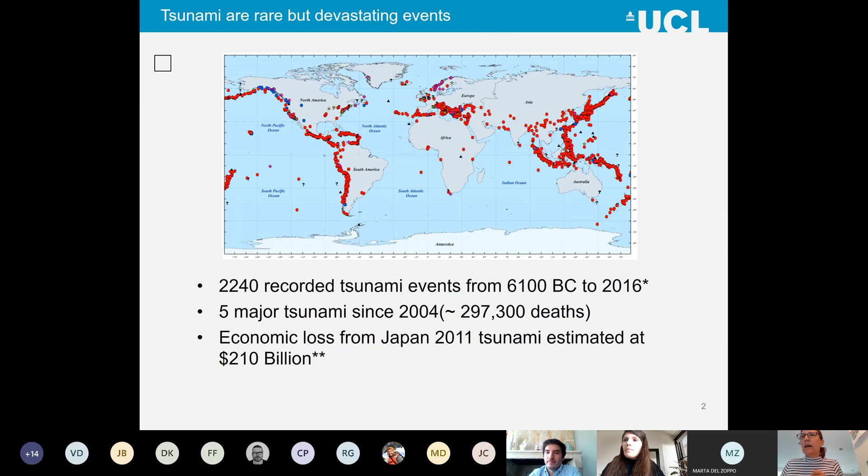The work that is presented today is part of research that I've been conducting for the last 13 years with a number of partners. So I thought I would list these here to start with, to show that this is not just one or two people's work, but actually the work that Marta and Marco are presenting. All of that has been led up to by significant collaboration with many partners across UCL, as well as outside of UCL, HR Wallingford, etc.

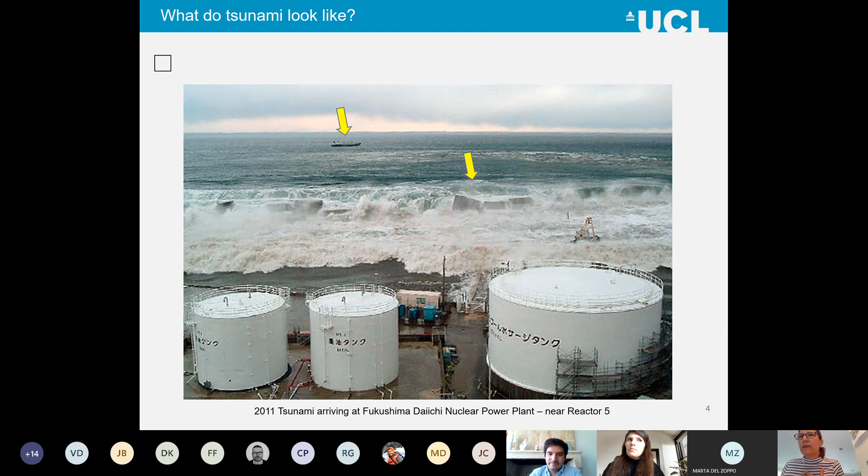A particular feature of tsunami compared to other waves is their wavelength. They are extremely long, and this is important from the point of view of the inundation properties as well as their forces on structures. So we're focusing on the structural engineering part of tsunami today.

But the characteristics of the tsunami have an important influence on the loading that the structure feels. This is a picture of the Boxing Day tsunami as measured by an echo sounder offshore of Thailand, showing a wave period of about 23 minutes. This long wavelength results in a very long duration inundation onshore.

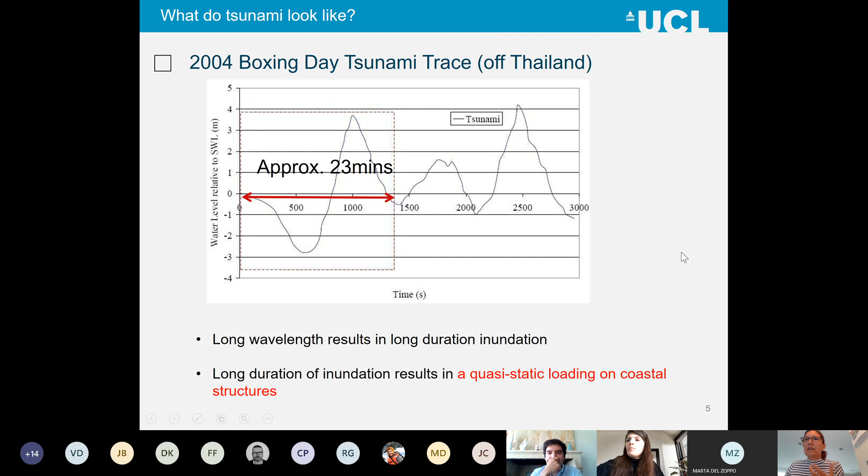So we're talking flows that last minutes, not seconds. This long duration inundation results in what we now know is a quasi-static loading on coastal structures. It's worth remembering this because many of you are earthquake engineers and not used to thinking about static loads so much as dynamic loads. A revelation to myself was that in the case of tsunami, buildings' dynamic properties are actually not excited.

In this image, I'm showing a set of curves for a single degree of freedom system, or a series of such systems with different ductility levels shown in different colors. It looks at what overstrength these elastoplastic systems can achieve when affected by loading that lasts a duration T compared to their period.

Looking at the curves can be difficult to interpret, so let me give a practical example. If we think of a 10-story building with a natural period of around 1 second and a ductility of 4, looking at the curve, its overstrength will be about 0 for any load that exceeds a duration of 3.5 seconds.

It's not exactly just the load duration, but a load greater than its yield strength. So as a tsunami load can exceed 20 minutes, the ductility plays very little role.

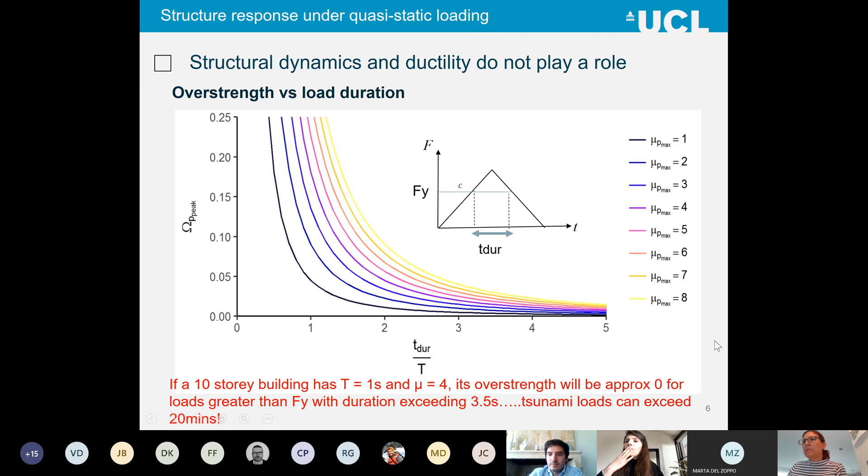And I think it's a difference that has been largely overlooked because tsunami engineering has been led by earthquake engineers. So what are the other differences between earthquake loading and tsunami loading? Quite simply, the distribution of loads.

If we think about a nonlinear static approach often used in earthquake engineering, you apply the loads in an inverted triangle, as shown here. In the case of tsunami, the loads come from below. The water inundates the ground story, first story, second story in sequence, so the loading is applied from below in a triangular approach.

Now, if we push over the structures using these two different loading distributions, we see very different loading capacity, or strength capacity, of the structures. Under earthquake loading, the seismic strength is actually much smaller than the tsunami strength. This is interesting, as there is no direct relationship between the earthquake capacity of a structure and its tsunami capacity.

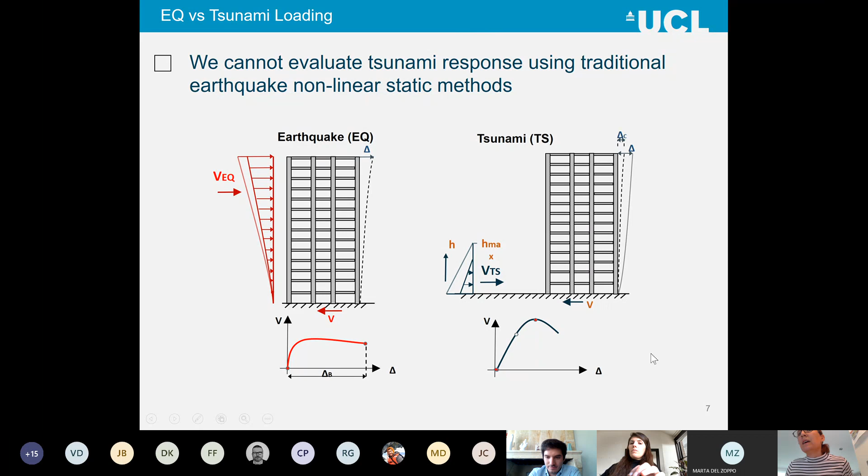This is something Marco will come to again in his presentation. So the two main differences between earthquake-responsive and tsunami-responsive structures are given by the nature of the loading: the fact that it comes from below, and the fact that it's long duration, so ductility essentially plays no role. A tsunami response is dominated purely by the strength of the building, with no contribution from ductility.

Tsunami loading, because it comes from below, applies massive shear forces, lateral shear forces on the elements, particularly at the ground story. Again, this is something you'll see in both Marco and Marta's presentations.

But because it's long duration loading, nonlinear static methods can actually represent the tsunami response of a structure well, much better than in an earthquake situation, because earthquake is a strongly dynamic loading. In tsunami, we assume it's static when applying pushover methods, and actually it is. So nonlinear static methods can represent tsunami response properly, but we cannot use the same methods we use in earthquake engineering.

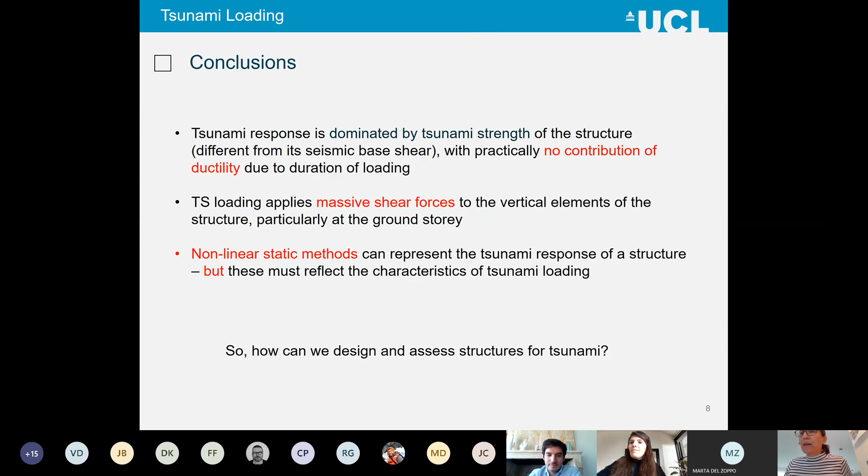So new tools need to be developed, and some of these will be explained by Marco. In the next two presentations, you'll see a summary of some of the advances in both design and assessment of structures for tsunami carried out by our research group and collaborators. I hope you will enjoy. I'll pass over to Marco first, and thank you all for listening to my short introduction.

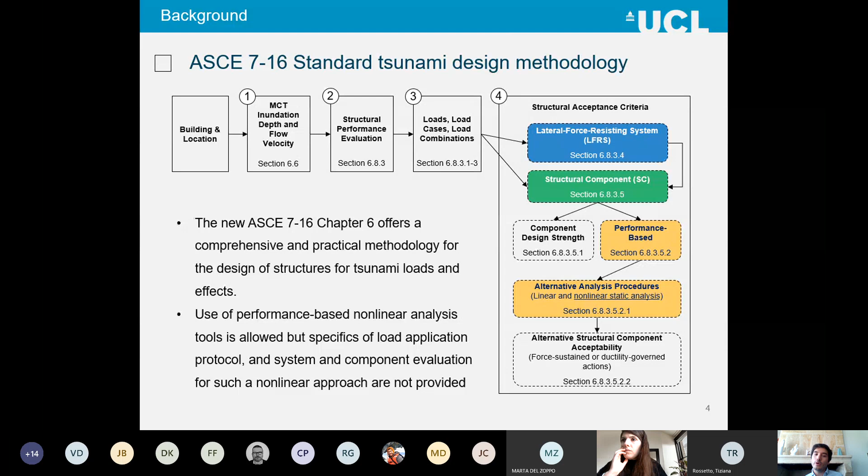So the question for most of you might be: how do we perform a tsunami pushover analysis? As Tiziana mentioned earlier, we can start from the seismic pushover analysis, which has been a typical approach in past research studies. Essentially, it's called constant depth pushover. You apply fixed loads at fixed locations along the height of the structure, and you push that structure up to failure, assuming a constant depth.

But as you may expect, this is not very realistic, because in a tsunami there is an increase and decrease of the tsunami depth and flow velocity over the duration of the event. That led to the development, a few years ago at UCL, of the variable depth pushover, which was found to better capture the effects of the tsunami on the structure.

In these analyses, both the tsunami depth and the flow velocity are increased following a load control approach. That is, however, a limitation, because it cannot capture the degrading branch of the pushover curve.

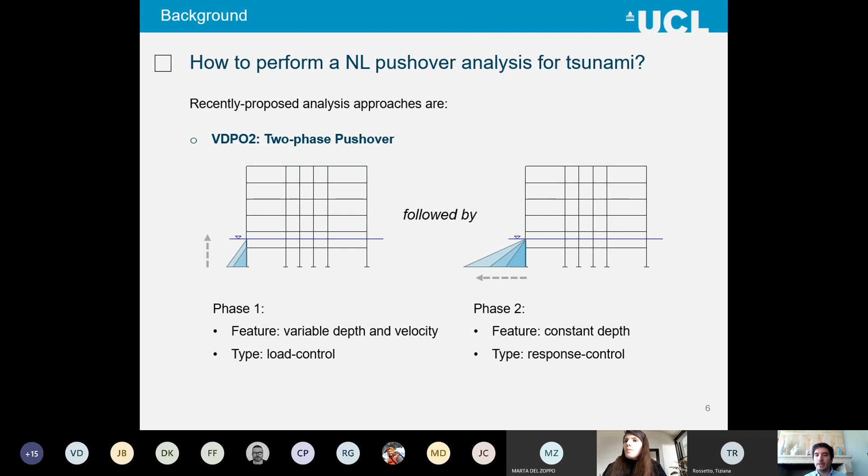So more recently, we came up with an approach called VDPO2. It's essentially a two-phase pushover that combines the advantages of both methods. In the first phase, we apply an increasing load in depth and flow velocity up to the point where we want to stop the analysis, because we have reached a prescribed load, or because there is a numerical convergence issue. At that point, the analysis switches to a second phase.

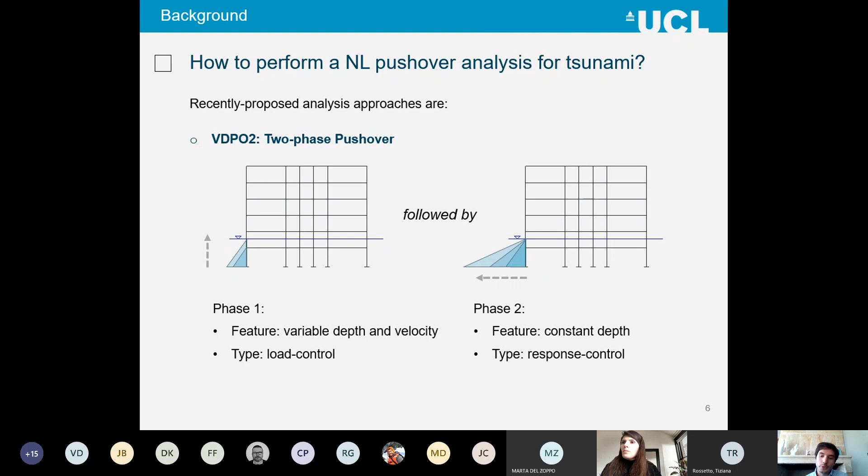Now, the presentation today will show you how we try to adapt this methodology within the design framework of the ASCE 7-16, to provide a tool that users and practitioners may follow when they have to design a structure for tsunami loading.

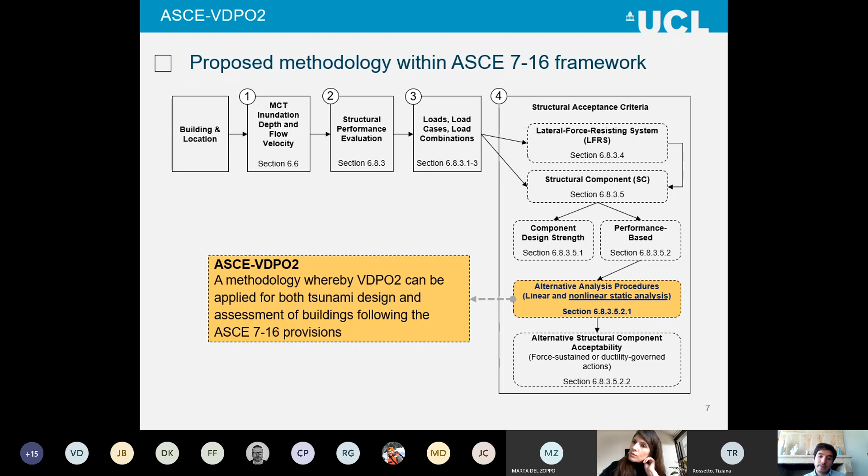To demonstrate this approach, I will be using a case study building: a six-story reinforced concrete building located in a very highly exposed area to tsunami in Seaside, Oregon. This area is also adjacent to the Cascadia subduction zone, so seismic and tsunami hazards are both very high.

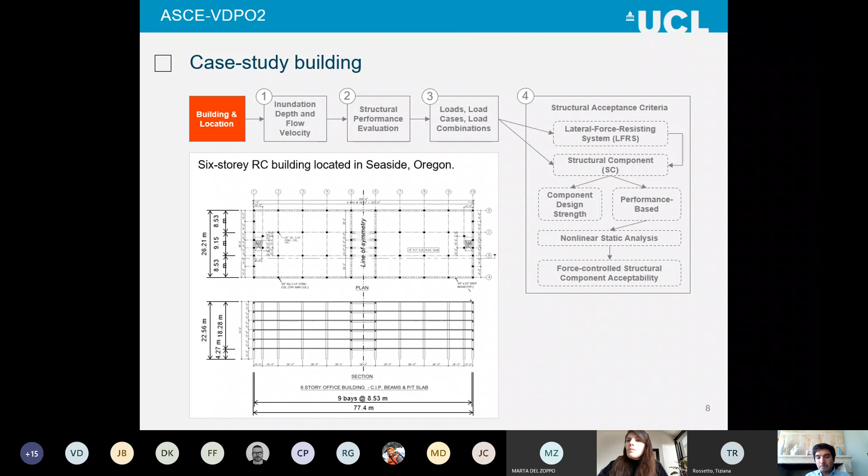What is important to mention here is that using this geodatabase tool, you can identify all the locations that are vulnerable to being inundated along the US coast by a 2,500-year event. That's the maximum considered tsunami according to the code.

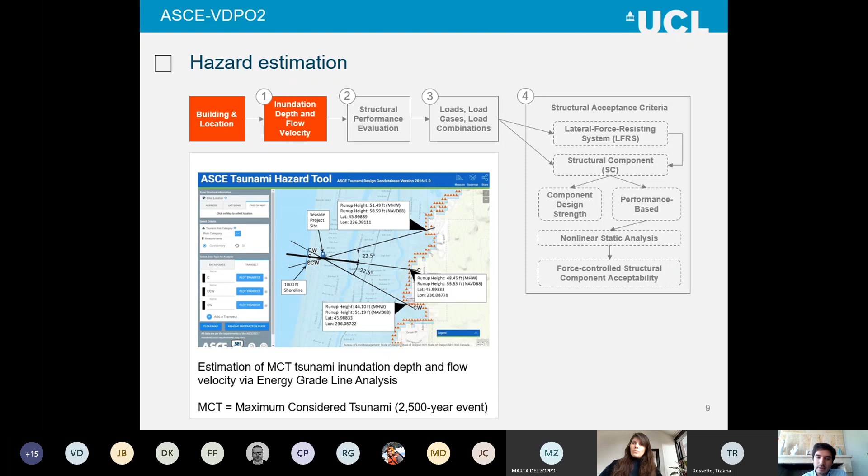So the code also provides a time history curve for the tsunami, meaning how the flow depth and flow velocity are assumed to vary during the event. That identifies some load cases that are part of the design process.

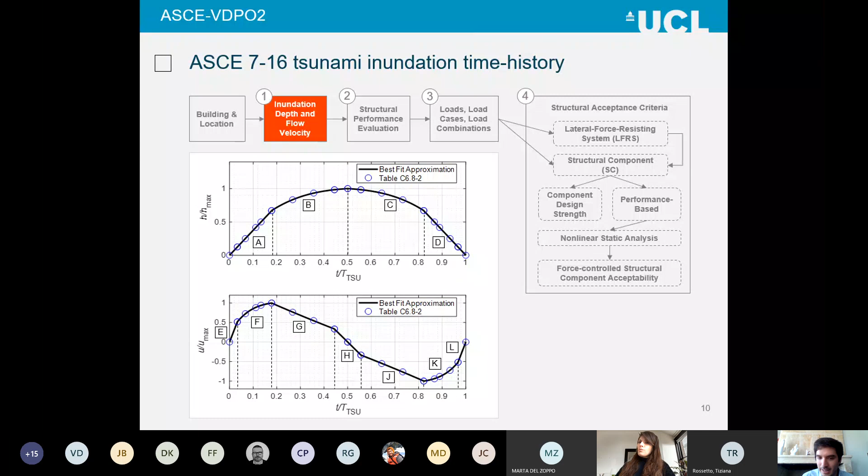What's important to remember is that these are the two main parameters that characterize the hazard at the building site, and one can relatively easily estimate the total force applied to the structure that will be resisted by the lateral force resisting system.

It's interesting to note that the maximum force occurs when the flow velocity reaches its peak and the flow depth is 2/3 of the maximum value. This stage is identified in the code as load case 2. So this is the background in terms of design.

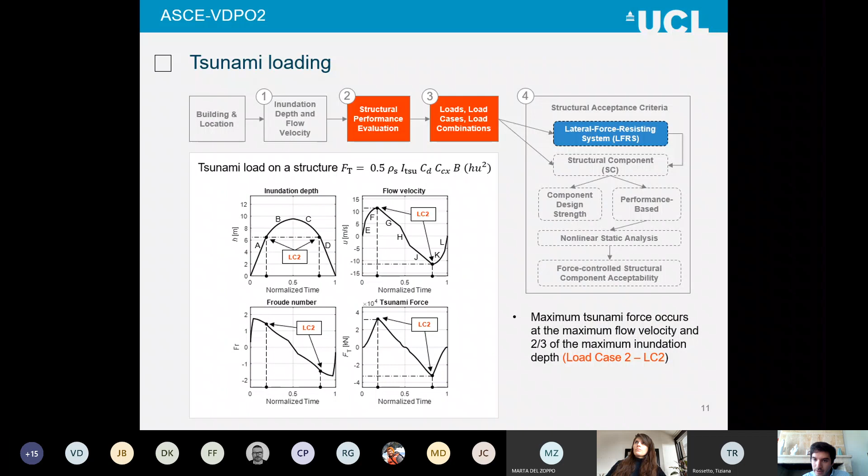So how do we apply all this into our pushover analysis? It's clear that load case 2 is controlling the design of the structural system. So what we have come up with is to apply directly the pseudo time history analysis curves provided by the code into the analysis tool, so that we can evaluate the behavior of the structure up to this maximum force. At that point, the analysis can switch to a constant depth pushover to bring the structure to failure.

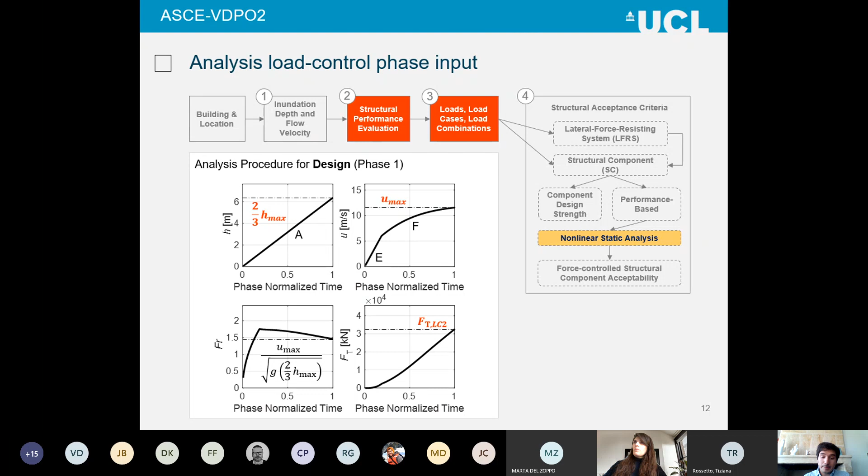But once we know this force, the question is, how do we apply this force to the structure? The ASCE 7-16 considers the tsunami force as uniformly distributed along the structure, but does not prescribe how this force should be applied along the columns when discretized.

A typical approach in past studies has been to do something similar to a seismic pushover, applying nodal loads at the story level—these could be named story loading discretization. An alternative approach tested more recently is, instead of applying loads just at the story level, to apply loads along the columns.

So a distribution of point loads along the columns was found to provide a better estimation of the impact of the tsunami loads on the structure.

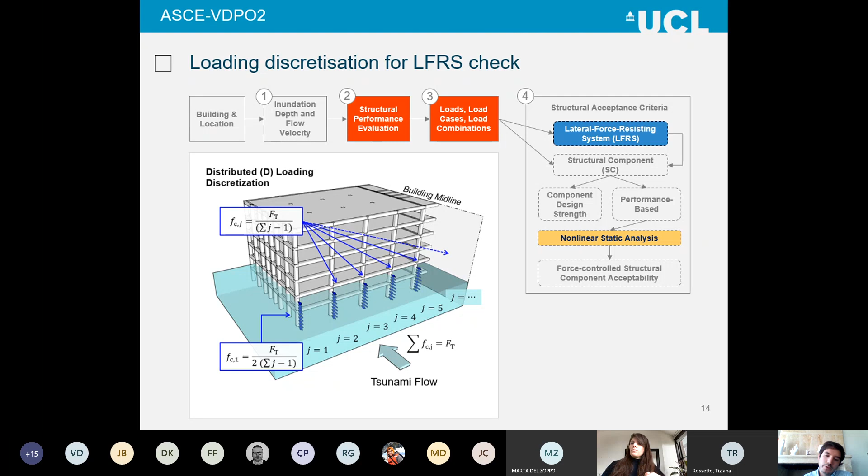An important aspect to understand here is that a portion of the loads by which we discretize the overall tsunami force goes directly to the foundation. So what we're actually looking at is the net tsunami force that is going to be resisted by the lateral force resisting system.

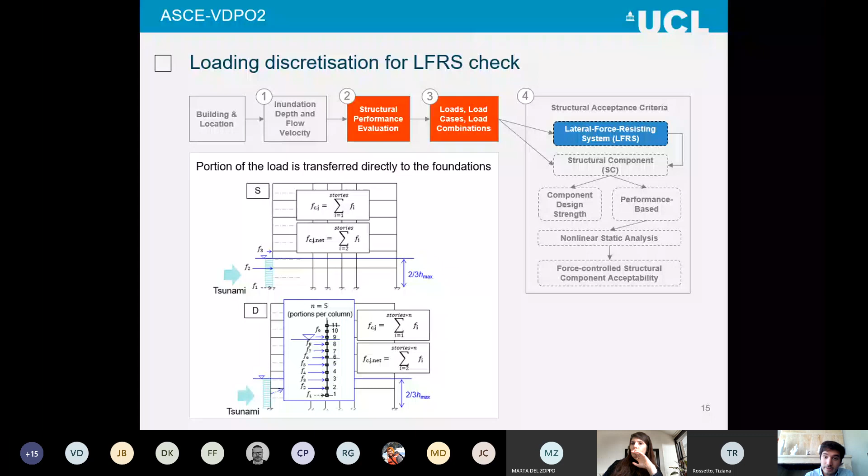At the start of my presentation, I mentioned there are two main checks to be done according to the codes. One is the systemic check on the structural system, but the second one is on the structural components. So individual structural components are subjected to an enhanced tsunami force due to local effects around the elements.

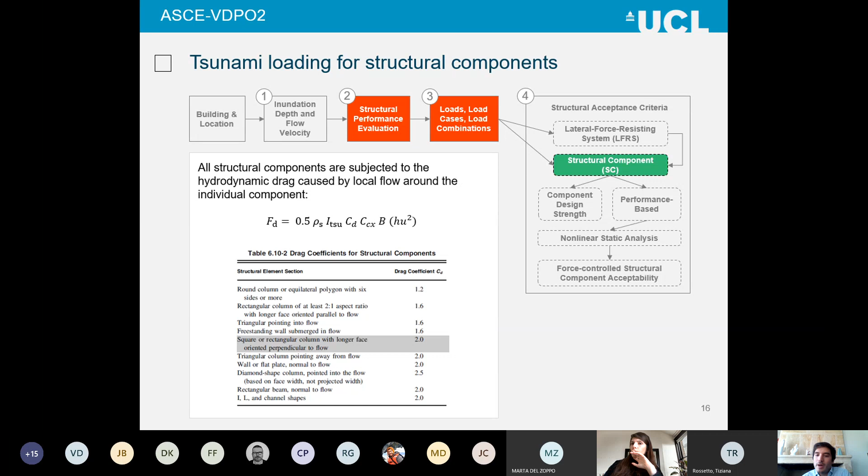Also, if these structural elements are part of the lateral force resisting system, they should be tested against the combined effect of the systemic and structural component loads. That means we need to come up with a discretization that accounts for this second check.

So this is what we have proposed: to apply a distribution of point loads to the individual line of columns where we want to perform the structural component test check, and apply to the remaining columns the remainder of the systemic tsunami force.

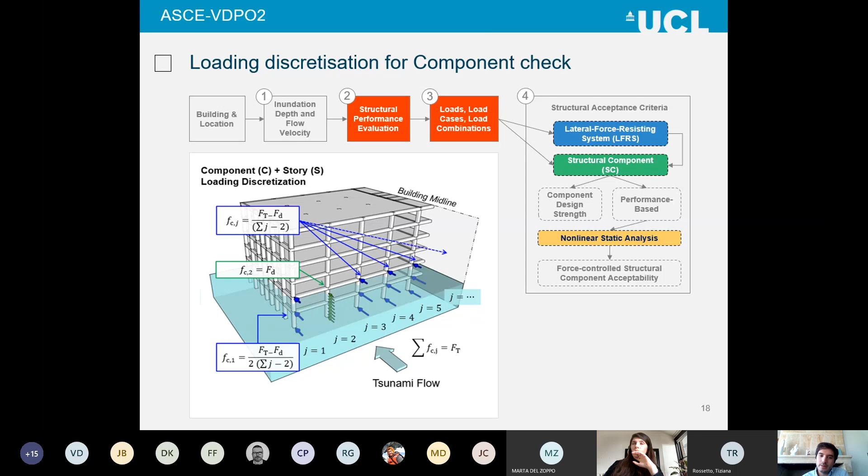These remaining columns can be subjected to either point loads or distributed loads, as in this sketch. We have tested all these assumptions and loading discretizations in a finite element model in OpenSees.

So I developed a 2D model of the structure. Due to time restraints, I'm not going to go into the details of this modeling, but I want to highlight two things. First of all...

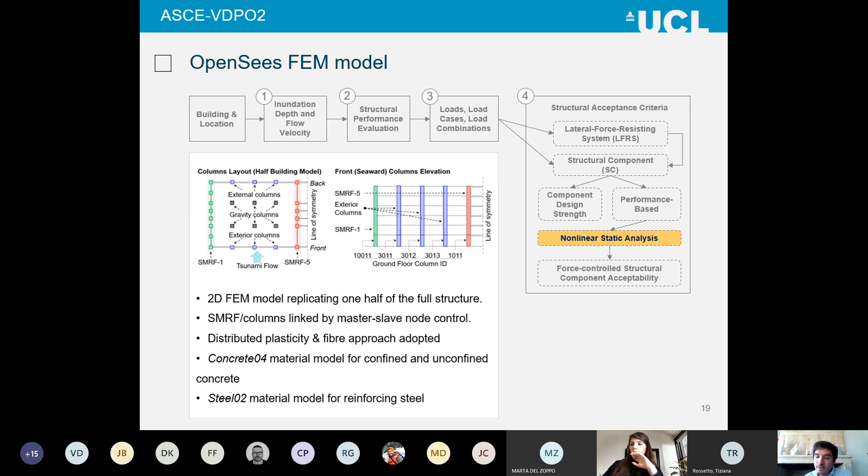A distributed plasticity approach for modeling the structural elements is essential because we are applying a distribution of point loads along the elements—something you may not always assume in a seismic pushover analysis. But also there are shear reinforcement variations along the ground floor and upper story columns, which can also play a role in the response of the structure to this tsunami loading.

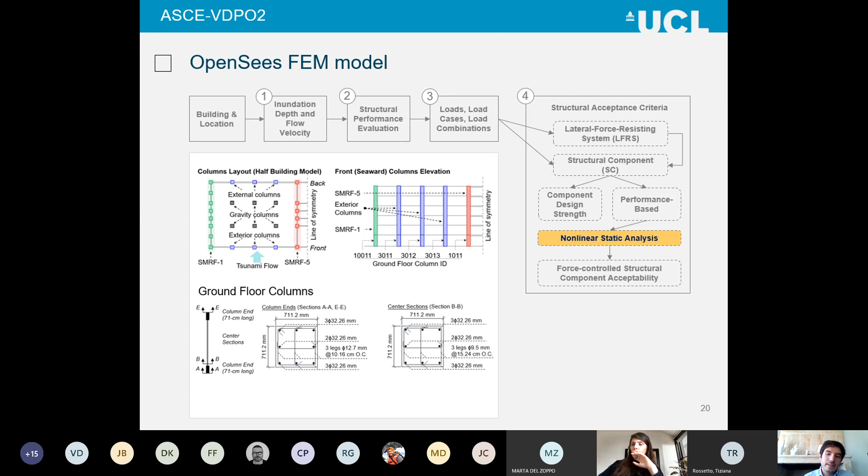So let's now have a look at the results and compare what you get using the prescriptive systemic check—what ASCE 7 tells you to do—by using a simplified approach that essentially compares the applied tsunami force as calculated before with the design strength of the structure, the seismic design strength of the structure, enhanced to account for the typical overstrength.

For this specific case of the building, the applied tsunami force is smaller than the expected seismic strength. But what is interesting to note is that this expected seismic strength, as defined by the code, is essentially based on the overstrength factor for the typology of frame—here a reinforced concrete frame—and the design base shear, depending on its location and the gravity weight.

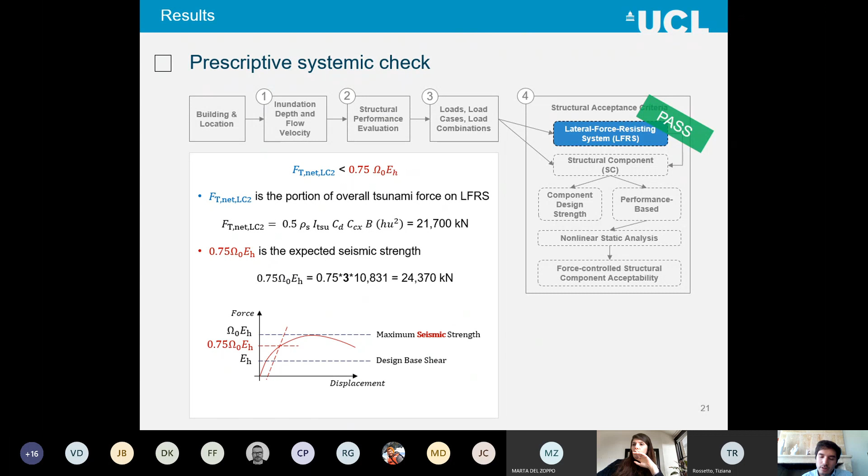So what happens when we apply instead a tsunami pushover analysis? Well, the overall outcome is the same, because the black line on the graph shows the tsunami pushover, which is much larger. The lateral strength is way larger than the tsunami load case force, exceeding the design event force by 40%. So the lateral force resisting system should be sufficient to resist the tsunami force according to both checks.

But to draw a fair comparison, we also performed a seismic pushover analysis on the building, and we found that the actual strength of the structure is smaller than what was expected by the code. Generally speaking, this identifies an issue with this simplified check, because in this specific case, using the actual strength, the simplified check would fail the test.

But more interestingly, as Tiziana mentioned at the start of her introduction, the behavior and response of the structure under tsunami loading is significantly different from the seismic one, because we can see an increased stiffness and increased lateral strength. This is what we have observed in past studies as well, because it reflects the different nature of how seismic and tsunami loads impact the building.

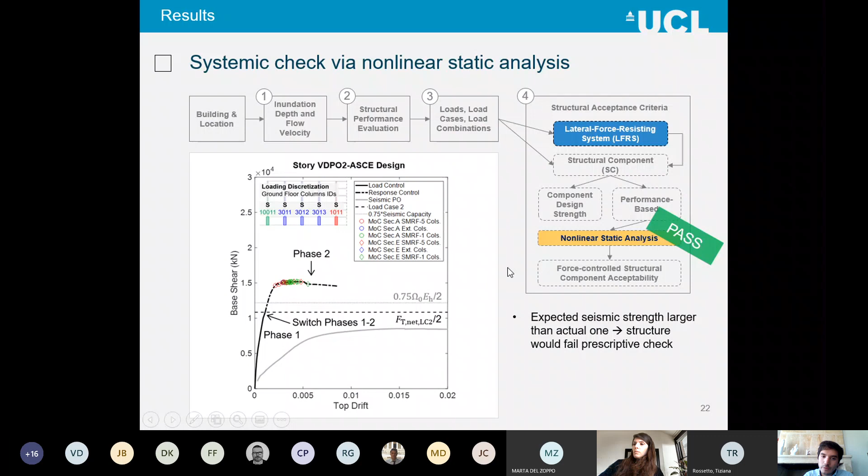When we use the other assumption for the discretization of the overall tsunami force, we can see a different strength, because the share of forces that goes into the foundation is much smaller under this assumption.

But since the forces are applied mainly at the ground story columns, this induces large shear forces, and therefore the occurrence of shear failure, shown here as filled markers along the curve. That occurs earlier than the flexural yielding in the columns.

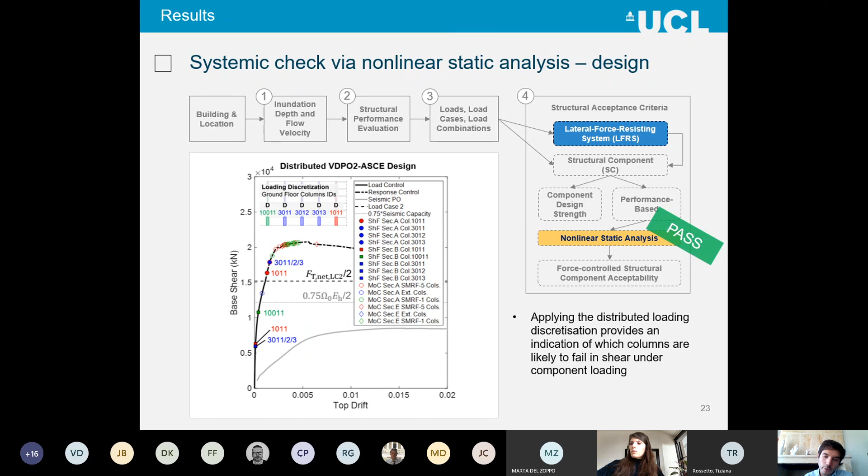Now, this distributed loading discretization can help us understand what happens when we apply considerably large forces at the columns, but it does not reflect the component loading, because the component loading, as I showed earlier, is an enhanced force on a single individual column.

So that is what we have done in the next check: for the structural component, we apply this enhanced loading on a single column and see what happens. Essentially, the output of this check is that the structure, or specifically the ground floor columns, need to be strengthened to meet the collapse prevention performance level.

You can see the advantage that by using the tsunami pushover analysis, you could identify, in a relatively effective way, which elements need to be strengthened. We found similar results using either distributed or story loads for the remaining elements.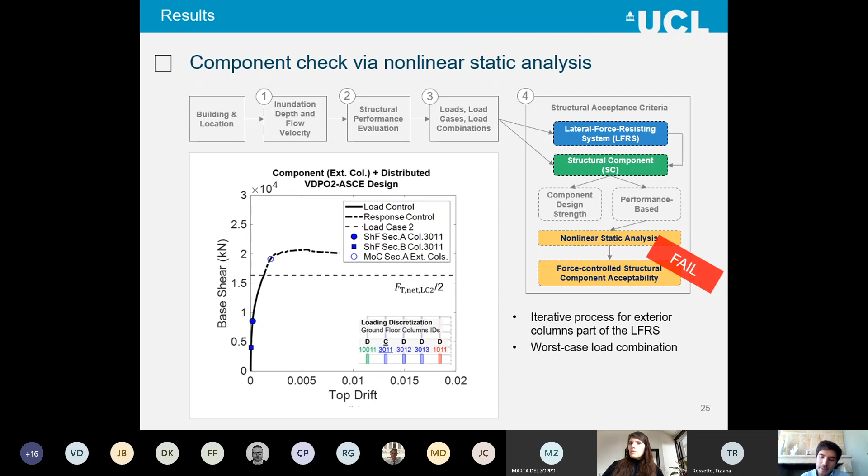To conclude, we can say that this procedure offers a tool to practitioners to apply tsunami pushover analysis in the context of the ASCE7 standard. There's currently no guidance for this, so it's something that has been welcomed by the ASCE subcommittee, and we're trying to implement this into the commercial software Seismostruct, to provide a tool that can be used more easily than in OpenSees.

There are two main remarks I would like to make before concluding. First, it's clear from these results that it's strongly recommended to perform nonlinear structural tsunami analysis instead of the simplified prescriptive check, due to the complexity of relating the seismic and tsunami lateral strength of a structure.

And when we look at the component loading, it's clear that having a tsunami pushover analysis can help identify better which are the critical elements that need to be strengthened, which could provide a more economical design instead of redesigning the entire structure to meet the design force required by codes.

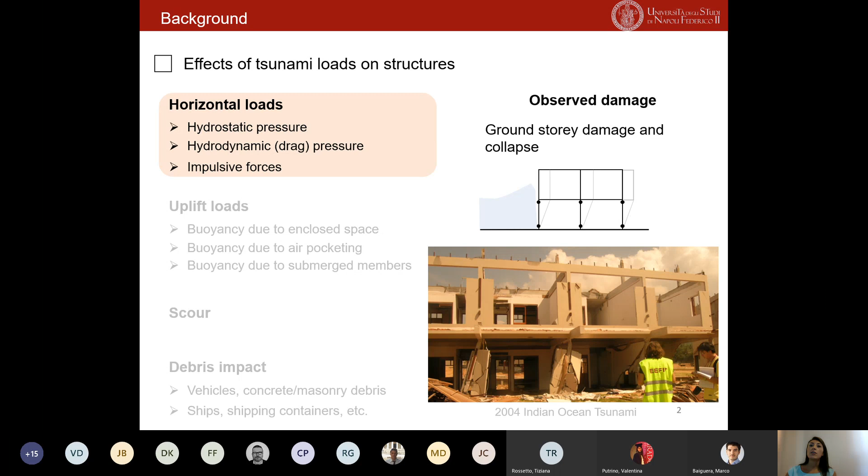Tsunamis are very complex phenomena that induce different kinds of pressures and effects on existing structures. We have horizontal loading in the form of hydrodynamic or hydrostatic pressure that impacts the exterior surface of the buildings, and can have high magnitude at the bottom of the building. Measured damage is concentrated at the ground story level in the form of flexural damage mechanisms, such as soft story at the ground level, or shear failure of the ground story columns.

But we have other kinds of loads, the vertical induced uplift loads caused by the tsunami on structures, that usually are not included in common analysis when we assess the behavior of the structure, but they play an important role in the overall performance.

If we think of a building with a very small opening ratio, or exterior enclosures able to sustain the tsunami flooding, we will have high buoyancy on the building caused by the enclosed air inside the submerged building. This enclosed space will develop uplift forces that apply to the foundation. These uplift loads, combined with horizontal loads from hydrostatic or hydrodynamic pressure, can sometimes lead to the global overturning of the structure, especially for buildings with shallow foundations.

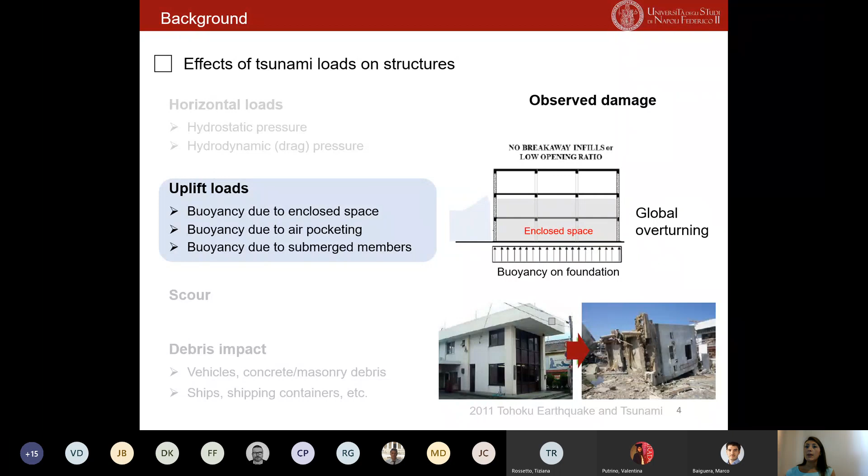But if the structure has exterior claddings that are not able to sustain the tsunami load, we will have failure of the exterior claddings, or windows in cases of high opening ratios, and the water will pass inside the building. In such a case, we still have some enclosed spaces developed below the slabs, for example in the form of air pockets.

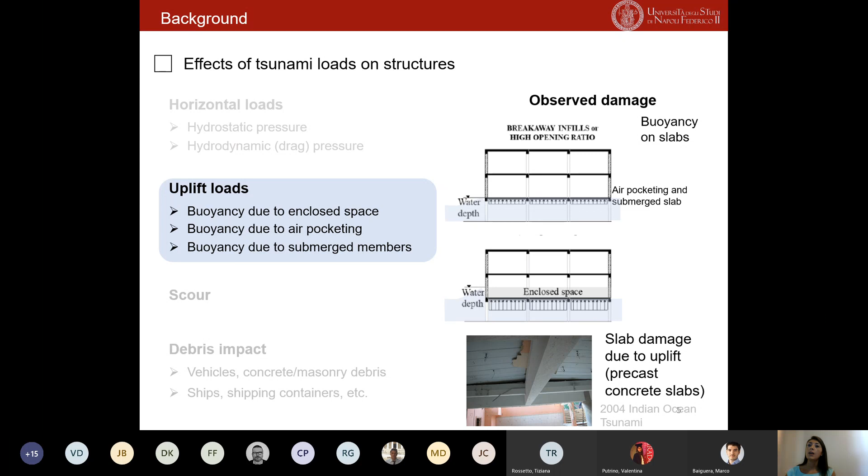We will also have a reduced weight of the submerged structural members. If the water level rises over the first story slab, we will still have some enclosed space inside the submerged building that causes uplift loads. In this case, these uplift loads act not on the foundation, but on the first story slab of the structure. In some cases, past tsunami surveys observed that these uplift loads can also cause uplift failure of the slab, mainly in the case of precast concrete slabs.

Then we have other effects, such as local scour, the local soil erosion below the foundation usually at corners of buildings, and debris impact caused by debris transported by the tsunami flow, which can cause local damage to structural members, and in some cases also partial collapse of the structure.

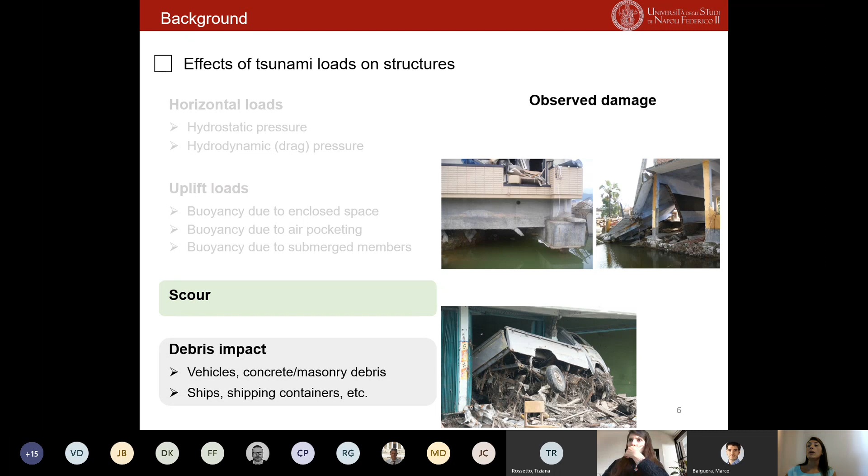Given these different effects that tsunami flow generates on a structure, we can define a general framework for assessing the performance of existing structures under tsunami loads and effects. Given the hazard map, we can define the tsunami parameters at the site of the building, compute the tsunami loading on the structure and foundation, and identify which is the governing failure mechanism for the structure, assessing the capacity accordingly.

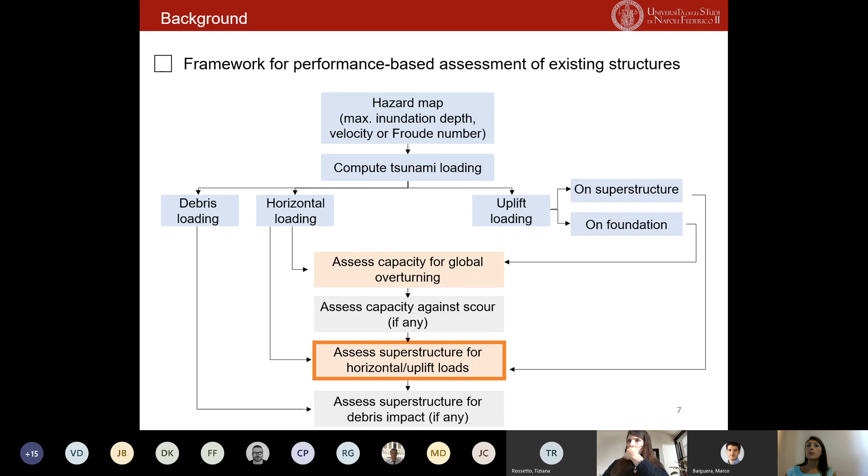So the methodology I'm going to present today is for the assessment of the superstructure behavior subjected to horizontal and uplift loads, under the assumption that this is the governing failure mechanism, and that global overturning and scour are not going to happen to this kind of structure.

This methodology has been developed to estimate the vulnerability of existing buildings in the Mediterranean region, particularly in Italian coastal communities. Existing structures on our coast are usually in the form of masonry buildings or reinforced concrete frame structures with unconfined masonry infill walls, and I will focus on this structural typology.

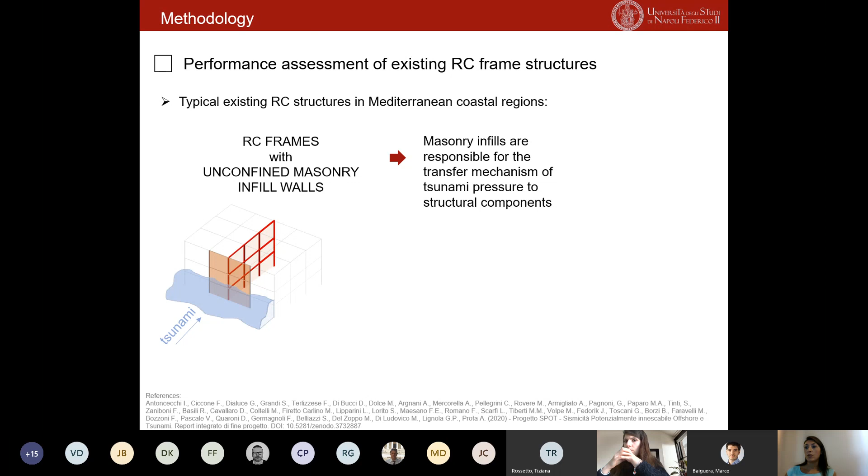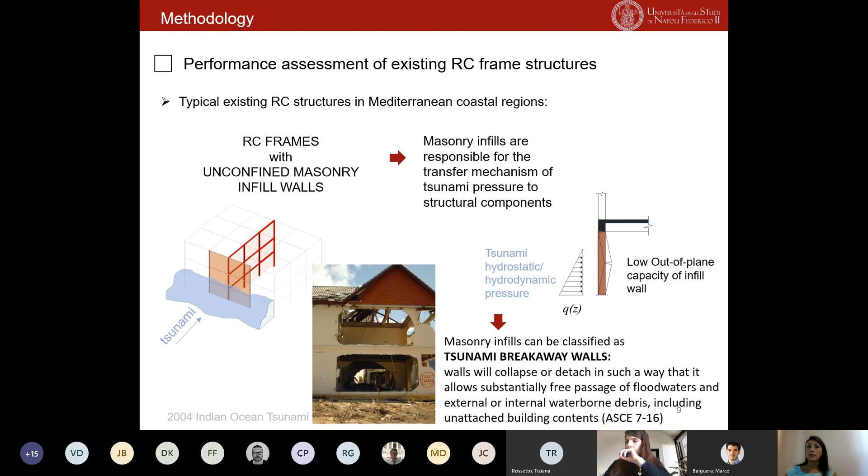If we consider a reinforced concrete frame hit by a tsunami flow, the water pressure will act on the unconfined masonry walls, which are responsible for transferring this load to the structural members. However, unconfined masonry infills have very low out-of-plane capacity, so they will probably fail under the hydrostatic and hydrodynamic pressure induced by the tsunami flow. According to ASCE, this kind of exterior cladding is classified as tsunami breakaway walls, meaning walls that fail under tsunami loading and allow the free passage of water and waterborne debris inside the structure.

We developed a procedure to incorporate the failure of these breakaway walls, along with all the loads related to water passing through the building, such as uplift loads acting on the interior slabs, within the general framework of the VDPO analysis that Marco has already presented. This methodology, which we call VDPO-BI, for VDPO with Breakaway Infilled frame, is still an incremental analysis that, for increasing inundation depth, simulates the actual distribution of loads on structural and non-structural components, accounting for the failure of the exterior claddings.

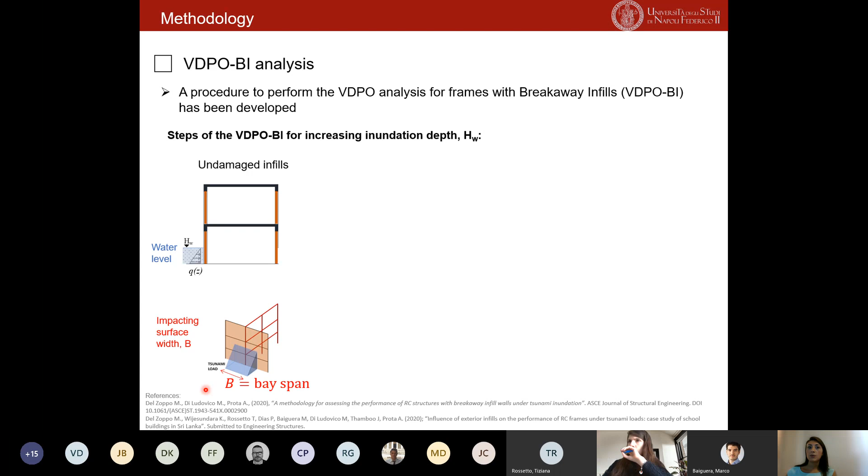Let's look at some steps of the analysis. At the beginning, before the failure of the exterior claddings, the building is watertight, so water is retained outside the structure, and the load acts only on exterior structural elements. The horizontal lateral pressure is computed considering an impacting surface width equal to the entire bay span of the structure.

But when the failure of the ground story breakaway infills is reached, water is able to pass through the building. So loads are applied to both exterior and interior columns, with a reduced width of impacting surface, considering that the failure of the infills will produce debris inside the structure.

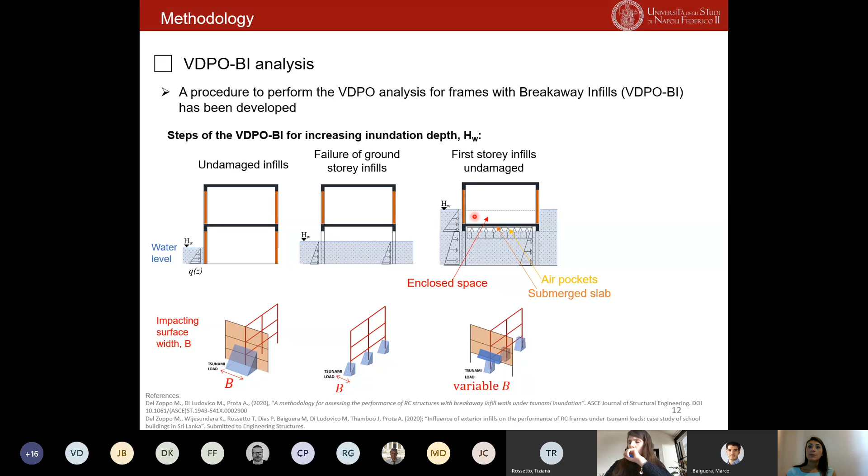When the inundation depth rises over the first story slab, we have uplift loads acting on the slabs, which generate loads contrasting the gravity loads still applied to the structure. These are a function especially of the enclosed space inside the building, which increases with increasing inundation depth, until the failure of the infills at the first story is achieved.

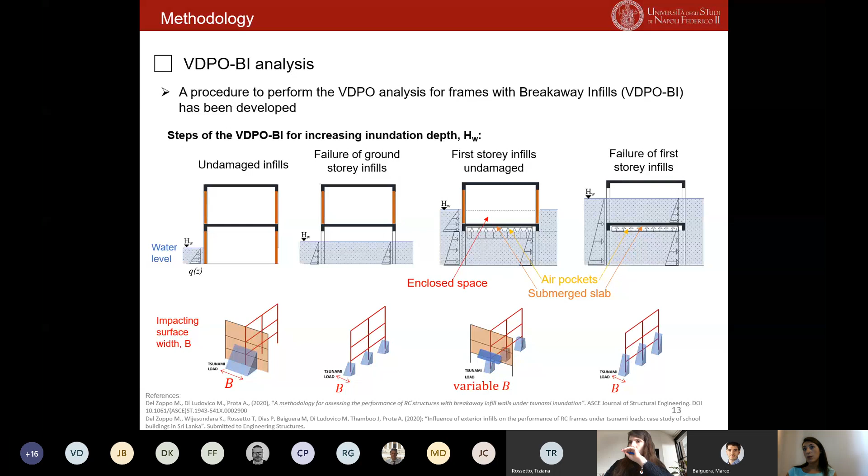This allows the free passage of water inside the second story, so both the ground story and first story will be completely submerged, which will change the distribution of horizontal and also uplift loads on structural members.

So when dealing with breakaway infill frames, how can we compute the tributary width for applying horizontal loads on structural members? Minimum values of this tributary width can be adopted, accounting for the effect of damming debris, since the tsunami flow carries a lot of waterborne debris that in some cases can accumulate in front of the building, increasing the impacting surface exposed to tsunami lateral pressure.

Of course, the exact definition of this value depends on the kind of structure being considered, the connection between the masonry and the structure, and other details of the specific case study.

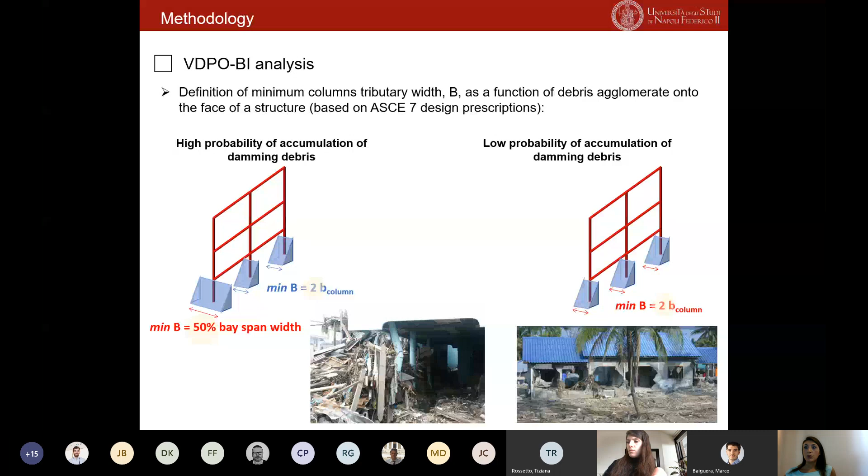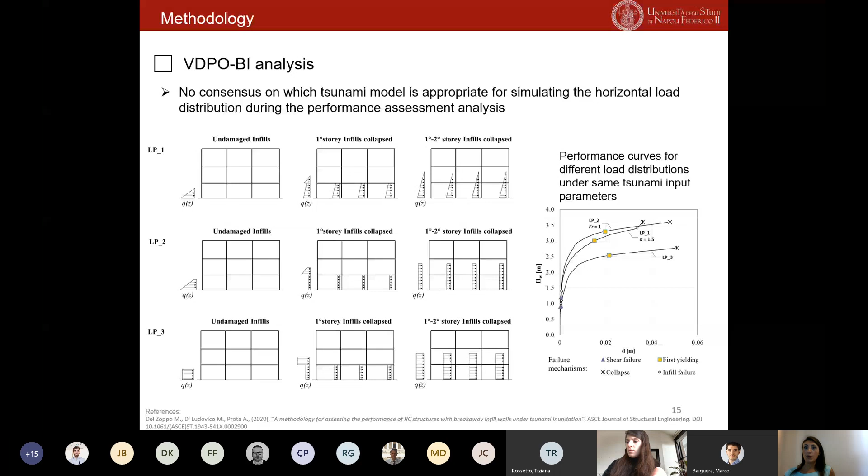The horizontal loads induced by tsunami can be applied to the structure in different distributions, and there is still no consensus about which distribution of horizontal load should be used during the performance assessment analysis. However, the selection of the load distribution is important—it's still an open issue, but it matters because it can affect the overall performance of the structure.

Tsunami loads need to be combined with gravity loads, and we can follow the prescription of ASCE 7 for the design of structures. According to ASCE 7, we can use two different load combinations for gravity and tsunami loads.

The first one is for buildings that are already evacuated before the tsunami comes, and it consists of reducing the dead load by 0.9 and assuming zero live loads. The second load combination is less critical, since it considers both dead loads and live loads.

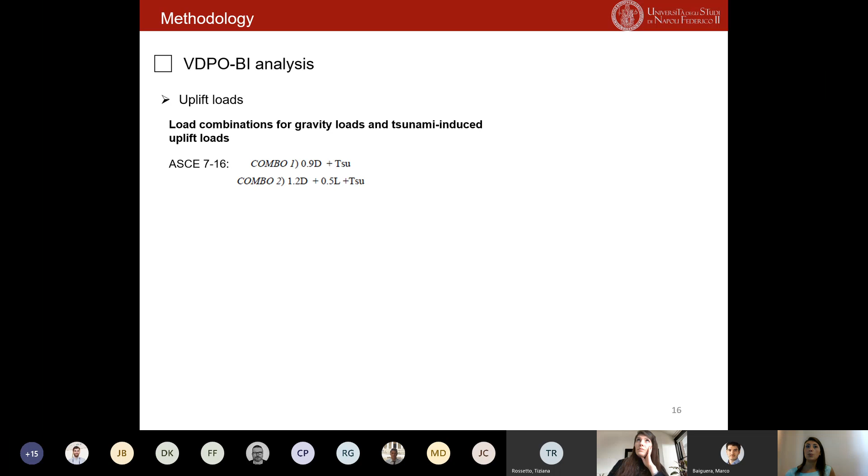The choice of load combination is also important because it affects the influence of the uplift loads on the overall structural performance.

If we look at a generic 3-story frame and the axial load variation in ground story columns during the analysis, for increasing inundation depth we can see that up to a certain point the axial load in columns is constant because it's given by the gravity loads. But when the uplift loads act on the slab due to buoyancy, we get a progressive reduction of axial load.

The enclosed space inside the upper story governs this load reduction, and it can lead to very significant reduction in axial load for ground story columns, with a related reduction in flexural and shear capacity. This continues up to the failure of the first story infills.

When the failure of the infills at that story is reached, the water will pass through the building, so this enclosed space component disappears, giving a release for the structure.

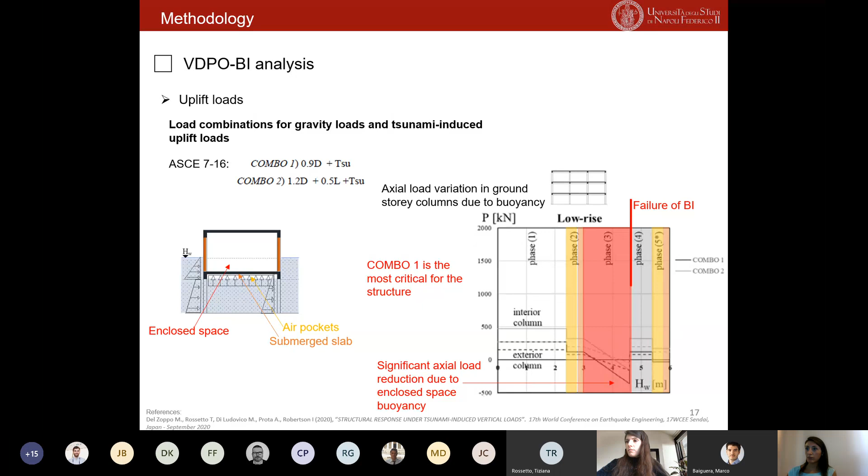This effect of uplift load is more significant in low-rise frames. If we compare the axial load variation for low-rise, mid-rise, and high-rise frames, the axial load reduction is less important as we increase the number of stories, because it's relative to the initial axial load from gravity loads, since the uplift loads caused by the tsunami are actually the same for all three cases.

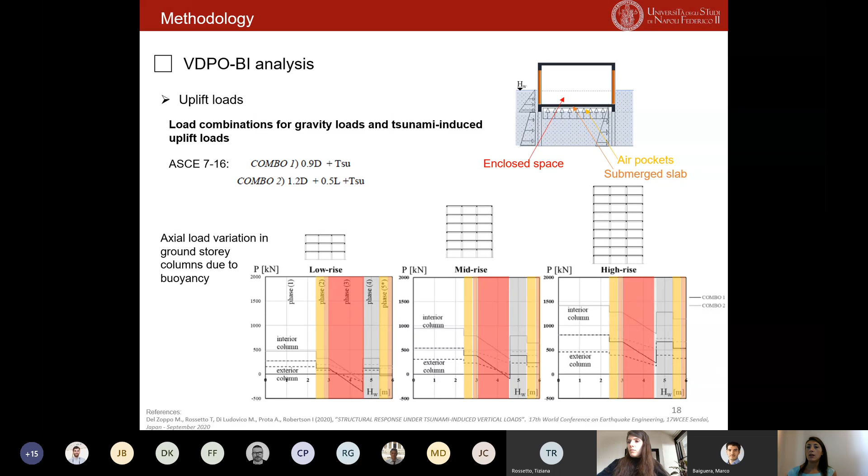Now let's see an application of the methodology. We will apply the VDPO BI for a 3-story RC frame designed for gravity loads only. For this application, I'm considering load combination 1, so the building is evacuated, and I'm assuming negligible damming debris accumulation at the side of the building, so I'm not overloading the exterior column.

Regarding the distribution of horizontal load, I'm using an empirical model developed by Qi et al. in 2014 with a triangular distribution. The Froude number for the tsunami characterization is assumed equal to 1.

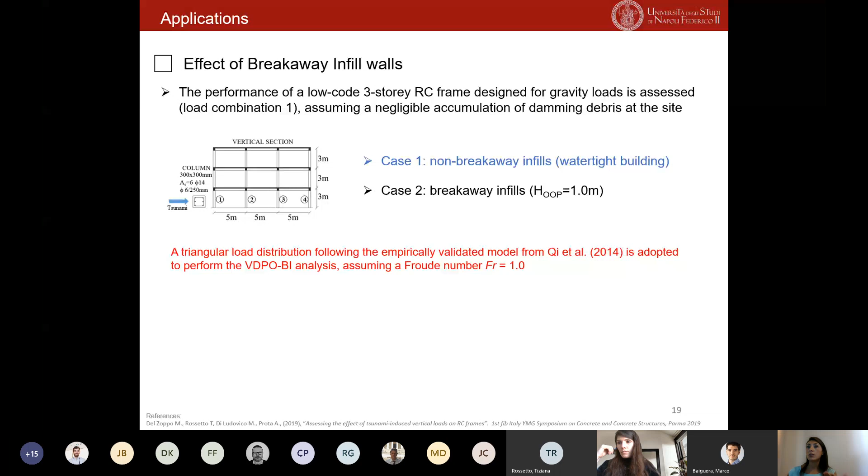For this first application, we are comparing the structural performance of a structure with non-breakaway infills, i.e. a watertight building, versus a structure with breakaway infill walls, assuming the out-of-plane failure of the infills happens when the inundation depth reaches 1 meter from the bottom of the infill.

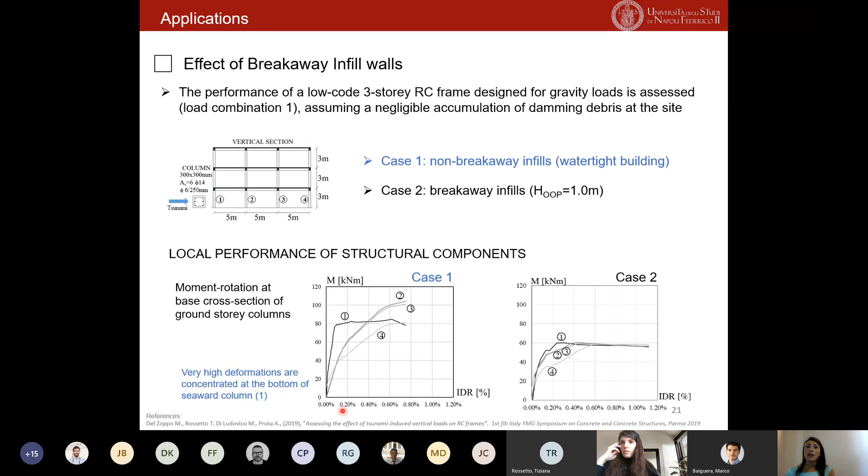Looking more in detail at the local performance, specifically the moment-rotation relationship at the bottom section of the ground story columns, in the case of watertight frames (case 1) we see high deformation at the bottom of column 1, where all the loads are applied in the watertight configuration, while other members remain elastic up to the achievement of a soft story mechanism with activation of all plastic hinges.

Conversely, in the case of breakaway infills (case 2), all the plastic hinges develop almost simultaneously in the ground story columns, because the same load is applied to all columns after the failure of the breakaway walls.

In terms of brittle mechanism, the shear demand to the exterior column, column 1, is shown here. This is the shear demand in the case of watertight buildings versus the black line, which is the case of buildings with breakaway infills. We can see that at 1 meter inundation depth, we have failure of the breakaway walls, and then a sudden reduction of the shear force acting on the exterior columns. This can, in some cases, postpone the shear failure.

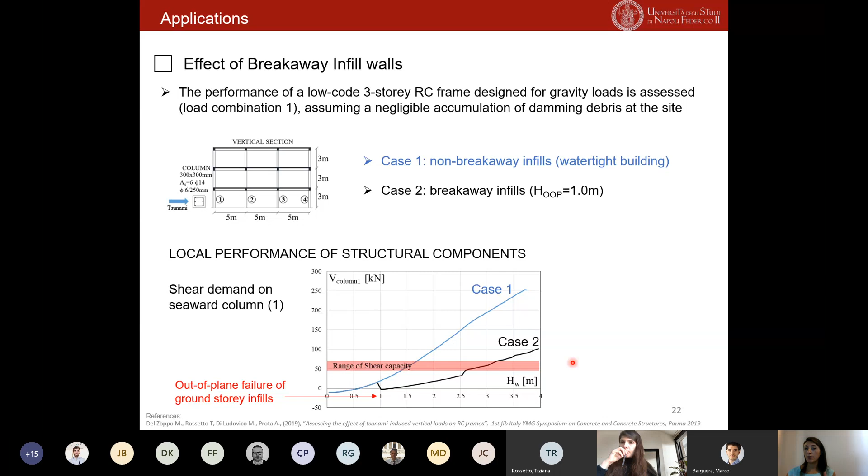So for this specific case, looking at the range of shear capacity as a function of the axial load variation, the failure of the breakaway walls will postpone the shear failure mechanism. Of course, this depends on the capacity of the column members and also on the out-of-plane capacity of the exterior claddings.

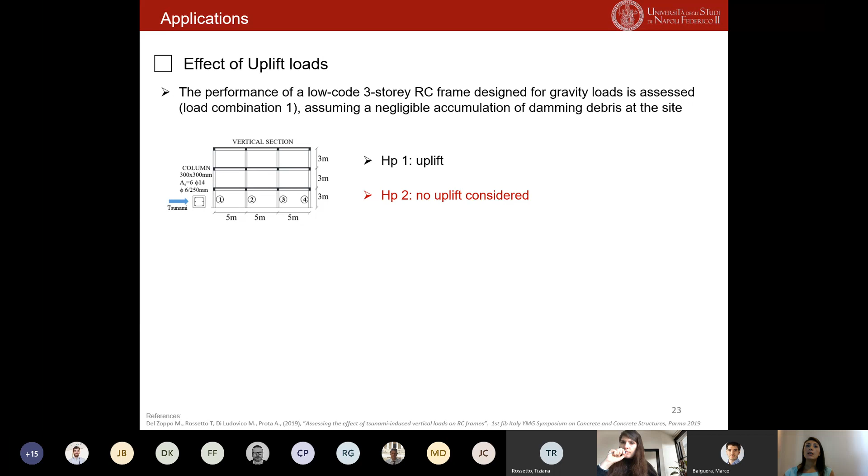Finally, to point out how relevant the uplift loads are on overall structural performance, the same analysis of the VDPO-BI has been conducted, now neglecting the uplift loads. Looking at the local behavior of structural members, particularly the axial load reduction in ground story columns for this case study, we see a strong axial load reduction up to zero values in both interior and exterior columns.

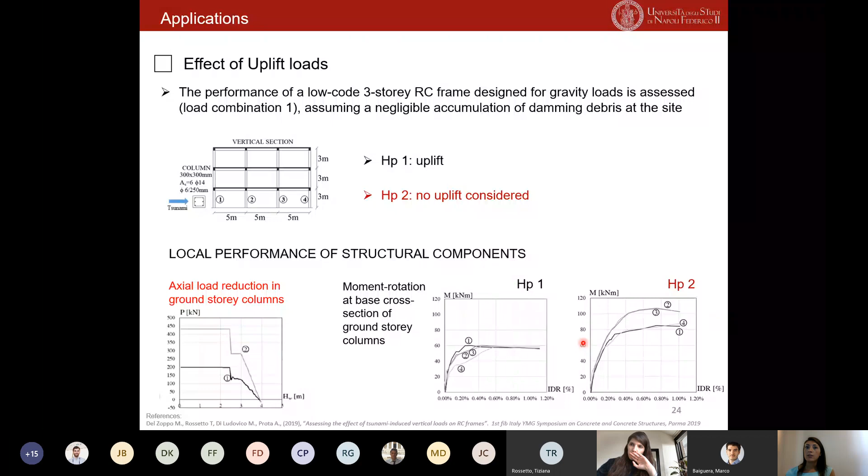This is reflected in the moment rotation capacity of the base section of ground story columns. This is the moment resisting capacity when uplift loads are considered, and this one, HP2, is when we are neglecting the effect of uplift loads. There is a very strong difference in terms of moment resisting capacity.

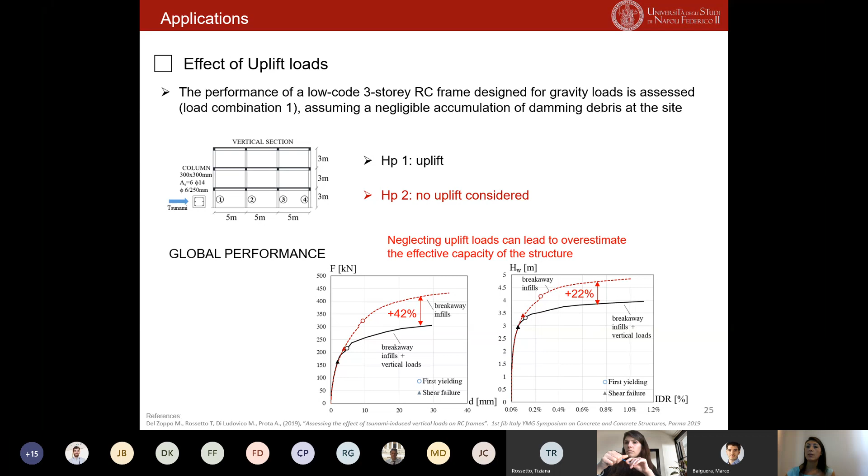This is reflected in the overall global performance of the structure, in terms of capacity curves, where the black line is always the capacity curve considering the uplift loads, and the red line is the capacity curve under the assumption of no uplift loads acting on the structure. It is clear that neglecting this kind of tsunami-induced load can lead to a strong overestimation of the actual capacity of the structure, both in terms of base shear and maximum inundation that the building can sustain during a tsunami inundation.

To conclude, we have seen that we don't have any guideline for the assessment of existing structures. So for assessing the behavior of existing reinforced concrete frames with masonry infills, we developed this variable depth pushover for frames with breakaway infills, the VDPO-BI. The application of this methodology has shown that the effect of the breakaway infills can strongly affect the global and local performance of the structure.

So the use of this kind of approach is recommended when dealing with frames, not only reinforced concrete, but in general frames with exterior claddings that can be classified as breakaway walls according to ASCE 7. We have also seen how much the uplift loads induced by tsunami affect the overall and global performance of the structure, and also the achievement of local mechanisms such as shear failure. So neglecting this kind of component in both design and assessment can be really dangerous, and it needs to be included in all analysis.

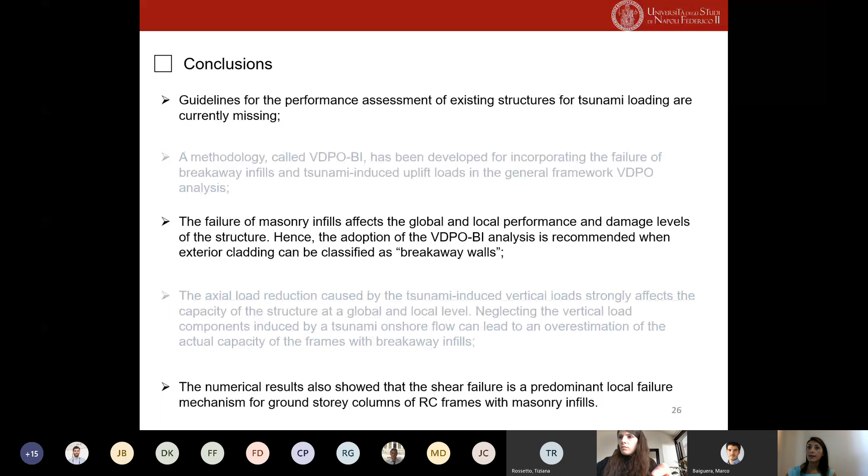Finally, we have also shown that for this kind of structure, with or without considering the effect of breakaway infill walls, the predominant failure mechanism is governed by the shear failure of ground story columns. Of course, this needs to be further investigated, also with experimental validation. Thank you very much for your attention, and if you have any questions.

Thank you very much. Can you hear me fine? Yes, very well. Okay. I really cannot see the chat box. Me neither. Okay, I think there are a couple of questions.

One is from Roberto Gentile: would it make sense to weaken the infills as a retrofit strategy? Tiziana replied yes, weakening the infills can be effective. Maybe, I don't know if Marta wants to say a little bit more on this.

Yes, definitely weakening the infills can reduce the load acting on the structure. Since we want to preserve the structural integrity and avoid the formation of debris, because the collapse of a structure will also become debris for other structures, in such a case, yes, we can suggest weakening the infill walls. Of course, we are assuming that this building is not used as an evacuation building, and all the contents inside the building can be lost. So in this sense, we can accept this kind of weakening strategy as a strengthening strategy for the structure.